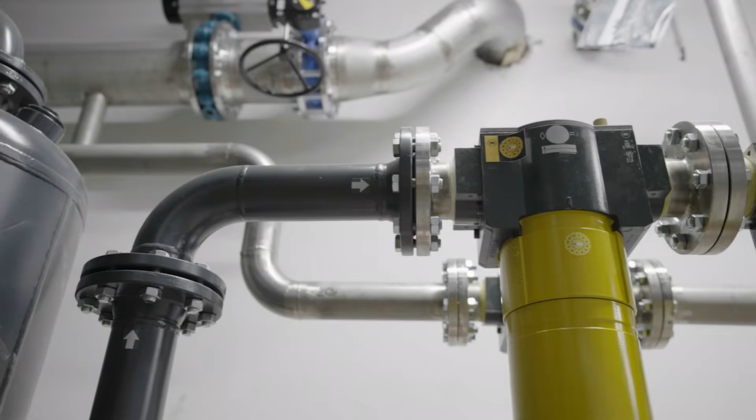For $500 in parts, you can install a system in your backyard that converts a single kilogram of trash into a full hour of cooking gas every day, with no electricity, no compressor, and no utility bill. It also produces about 10 liters of liquid fertilizer a day as a byproduct, and captures the methane that would otherwise escape from your trash into the atmosphere.

Yet across the United States, fewer than 1 in 10,000 homes runs one, and in most municipalities it's nearly impossible to legally install. This is called a home biogas digester. And this is the story of an idea older than the Roman Empire, the 3 Israeli engineers who turned it into a flat-pack appliance, and the reason your gas company would rather you never heard of it.

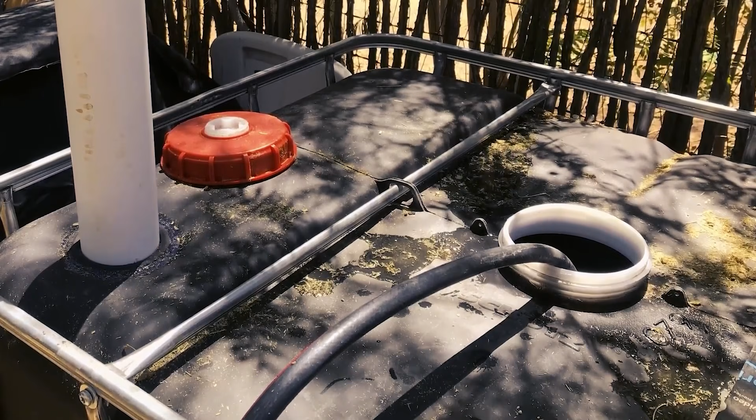The home biogas digester is not a modern invention. To understand where this system actually comes from, we have to go back roughly 3,000 years to the bathhouses of ancient Assyria. Evidence of biogas use dates to the Assyrians in the 10th century BC, where the gas from decaying organic matter was captured and burned to heat bath water.

The Assyrians did not know what methane was. They did not know about anaerobic bacteria. What they knew was that covered pits filled with manure and plant matter produced a flammable gas that could be piped into a stone hearth and lit on demand. It was, in every meaningful sense, the world's first domestic natural gas system, and it predates the steam engine by 27 centuries. But the Assyrians were not alone.

The same principle showed up, independently, on the other side of the continent. Marco Polo's accounts reference covered sewage ponds, and the use of biogas is mentioned in ancient Chinese literature dating back 2,000 to 3,000 years. In rural China, villagers fed sealed pits with kitchen scraps and animal waste, then ran a bamboo pipe out the top and into the kitchen stove.

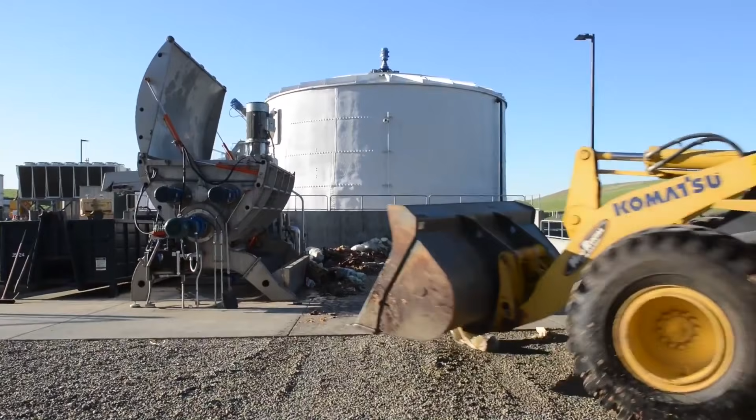Marco Polo returned to Europe from his Far East voyages and described the domestic dragons he observed keeping the streets clean in China. He was describing biodigesters. Europe ignored him for 600 years. The first formal engineered version of this system did not appear until 1859 in a leper colony in Bombay, India. The goal was sanitation, not energy. But the engineers quickly realized the gas coming off the sealed waste tank was clean enough to fuel lamps.

In Exeter, England, a sewage treatment facility captured that gas and used it to fuel the town's street lamps in 1895. Victorian England was lighting its streets with the methane from its own sewage. And then, almost overnight, the world forgot. Natural gas pipelines arrived, and the entire industry pivoted to extracting methane from underground instead of harvesting it from the waste stream every household already produces. But the technology never died. It just got pushed to the margins, where it waited for someone to bring it back.

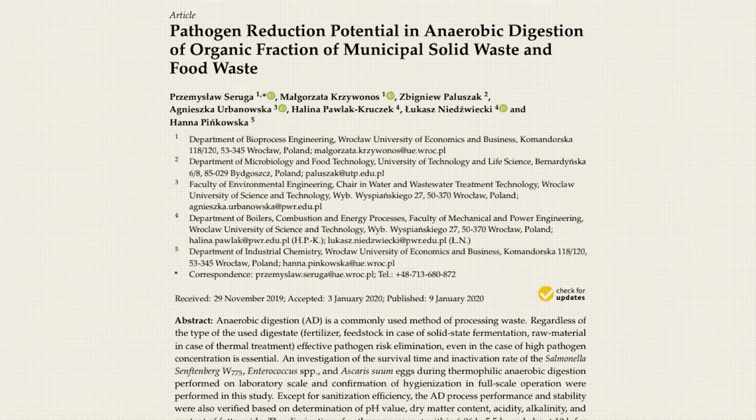That someone arrived in 2007. Yair Teller, an Israeli researcher working on anaerobic digestion at Ben Gurion University, traveled to Mexico and observed small biogas systems running in rural villages. Teller and his eventual co-founder, Oshik Efrati, acquired biogas systems from China and India, installed them locally, and quickly judged them to work poorly. They suffered from poor efficiency, unpleasant odors, and insect infestations. The traditional designs were fixed-dome concrete pits poured in place. They leaked, they smelled, they attracted rats, and they were almost impossible to ship.

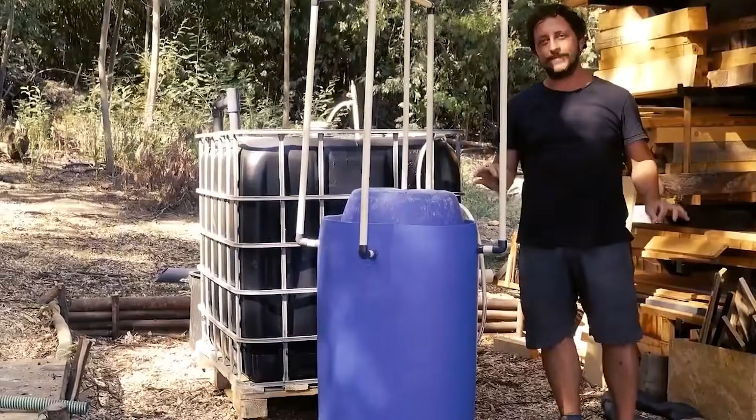So, Teller and Efrati started over. The breakthrough came in figuring out that the digester did not need to be a hole in the ground. It could be a sealed, flexible polyethylene tank, prefabricated in a factory, shipped flat in a single box, and unfolded in a backyard in under 2 hours.

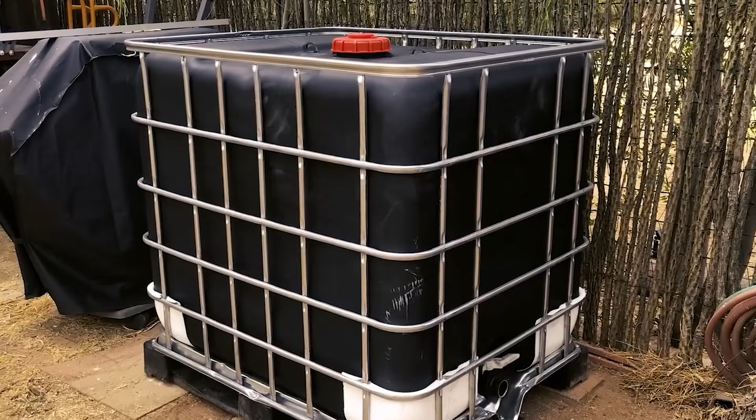In 2012, Teller, Efrati, and Erez Lanzer formally created HomeBiogas in Beit Yanai, Israel. The product was a family-sized above-ground biodigester that looked more like a small camping mattress than an industrial waste plant. It could be installed without a permit in most of the developing world, and it actually worked. By 2022, HomeBiogas had deployed units in more than 100 countries.

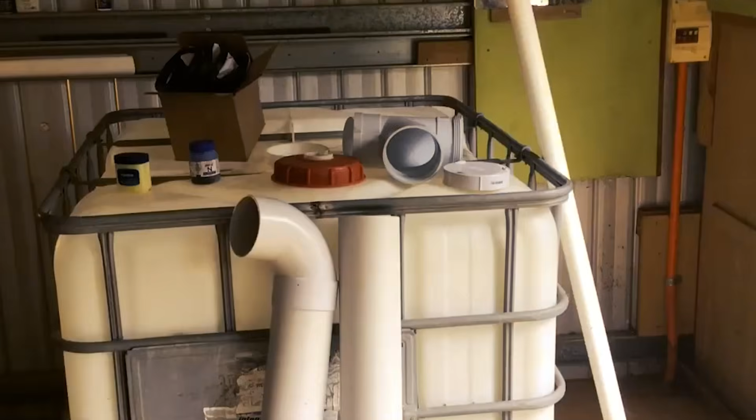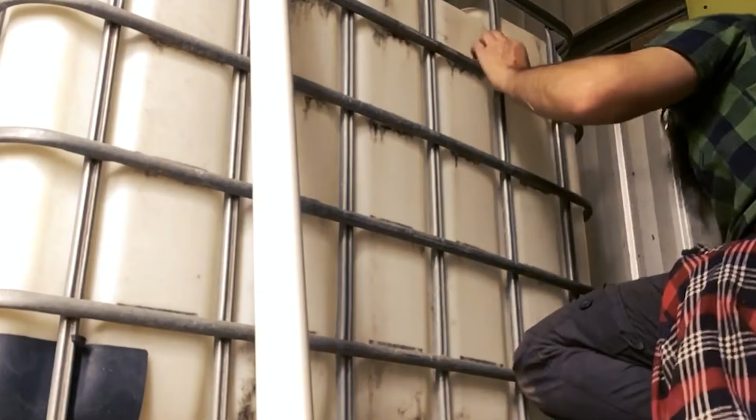But to understand why this matters, you need to understand the physics of what is happening inside that tank. Because once you see it, you'll realize this is not a hippie composting project. This is precision microbial engineering. Here is how it works. When you drop a kilogram of food scraps into the inlet pipe of a biodigester, you are feeding it to a 4-stage microbial assembly line that has existed on Earth for roughly 3.5 billion years. The bacteria that break down organic matter into biogas are some of the oldest single-celled organisms on the planet.

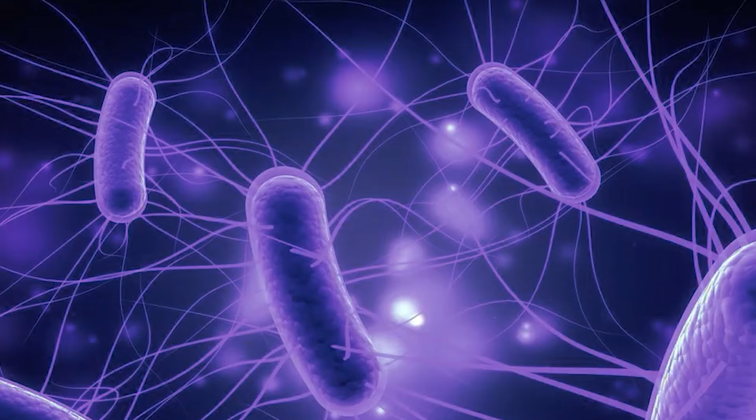The process is called anaerobic digestion, and it runs in 4 named stages. Stage 1 is hydrolysis. Specialized bacteria break the long molecular chains of food, proteins, carbohydrates, fats, into simpler sugars, amino acids, and fatty acids. Stage 2 is acidogenesis. A second wave of bacteria ferments those simple molecules into volatile organic acids.

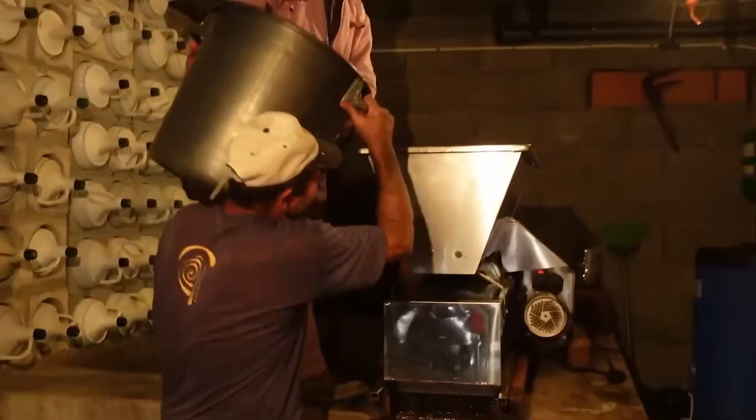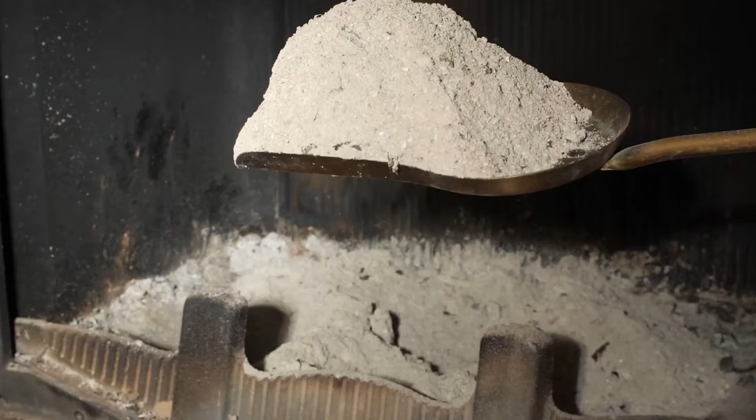Stage 3 is acetogenesis. A third bacterial population converts those acids into hydrogen, carbon dioxide, and acetic acid. And stage 4 is the magic step, methanogenesis. Methanogens are not regular bacteria, they are archaea, a separate domain of life, older than bacteria, and the only organisms on Earth capable of producing methane as a metabolic byproduct. They are also extremely picky.

That gas rises to the top of the tank, gets captured in a sealed reservoir, and runs through a single low-pressure hose directly to your kitchen stove. No compressor, no pump, no electricity. The gas pressure is generated entirely by the weight of the water in the digester pressing down on the gas pocket above it. It's the same principle that pushes a soda bubble up through a straw, and the output numbers are not theoretical.

Home biogas can process as much as 6 liters of food waste or 15 liters of manure per day. The inventors of the device claim that it can eliminate 1 ton of organic waste per year and reduce users' CO2 emissions by 6 tons, equivalent to the consumption of a car.

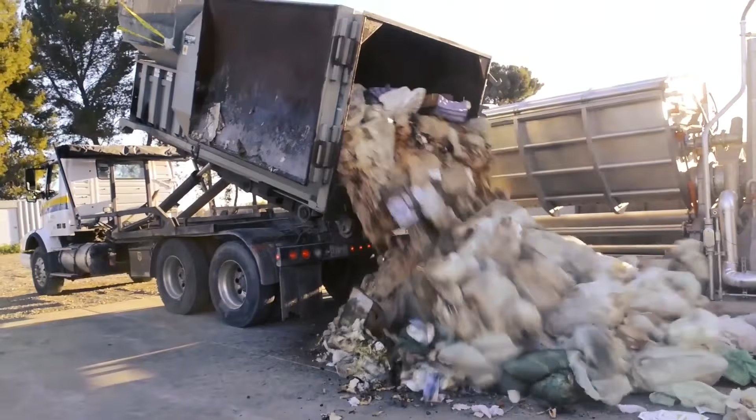T.H. Culhane, a National Geographic explorer who has been building IBC tote biodigesters in slums for over a decade, measured his own system directly. 25 liters of feedstock slurry produces approximately 1,000 liters of uncompressed biogas per day, which allows you to cook on a medium flame on a single burner for about 2 hours. 1 cubic meter of biogas is energetically equivalent to about 2.5 kilograms of firewood, 1.6 liters of kerosene, or 4.7 kilowatt hours of electricity every day from garbage for free.

But raw numbers don't tell the full story. The real proof of this technology comes from the places where it has already replaced the grid entirely. In 2015, in the Palestinian village of Al-Auja in the Jordan Valley, a deployment funded by the Peres Center for Peace installed about 40 home biogas units in Bedouin households with no access to a gas grid. The project received $500,000 in financing from the European Union.

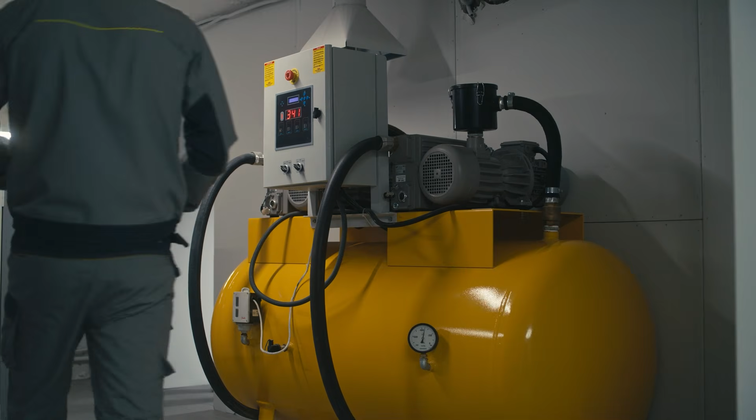Within months, indoor air quality measurably improved, child respiratory complaints dropped, and the women of the village stopped walking 3 kilometers a day to gather firewood. The cooking gas was free, and the liquid fertilizer ran their kitchen gardens. In 2022, the United Nations selected home biogas for the 3rd time in a single year to deploy units in refugee camps. In Rwanda, the systems were fitted with methanogenic bacteria, similar to those found in the stomachs of cows, breaking down agricultural waste into clean gas and biofertilizer.

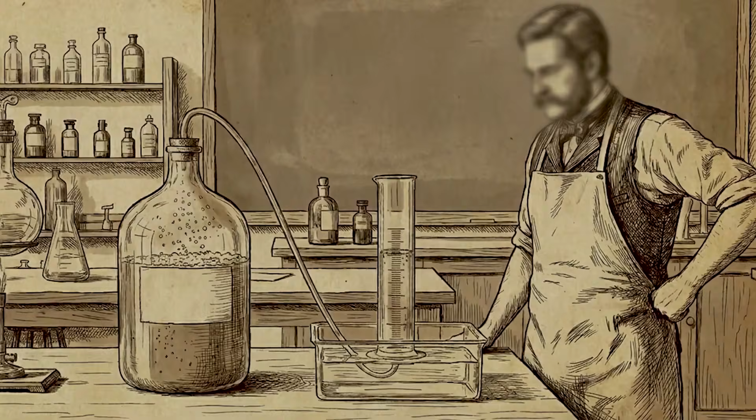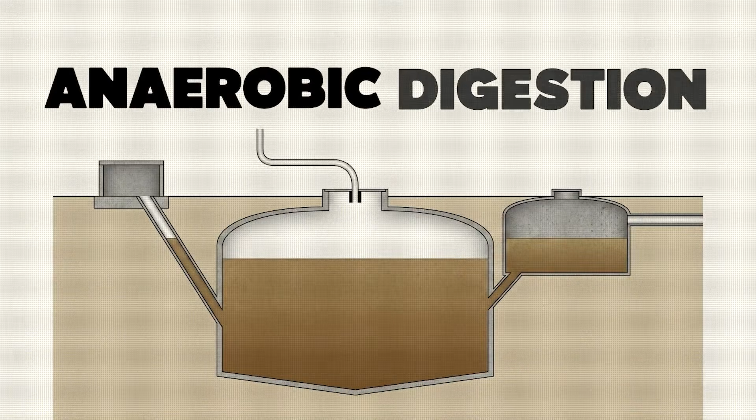In Cairo's Zabaleen trash recycling community, T.H. Culhane's team installed rooftop biodigesters in homes that had no gas service at all, homes built on top of garbage. Those families now cook on gas made from the very garbage their neighborhood sorts. These are not pilot programs. These are working installations in some of the harshest environments on Earth, in active conflict zones and refugee camps, on rooftops in the densest urban slums in North Africa.

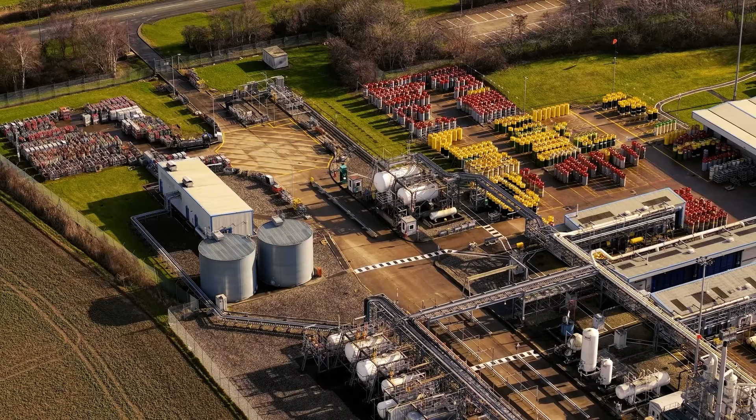So, if this technology has been proven in war zones, in deserts, in refugee camps, and in trash recycling neighborhoods, why has it not become standard in the suburbs of Houston, or Phoenix, or Atlanta, where the climate is warm enough for the methanogens to run year-round, and where the average household throws away more food per week than a Bedouin family throws away in a month? Because the system was never designed to let you.

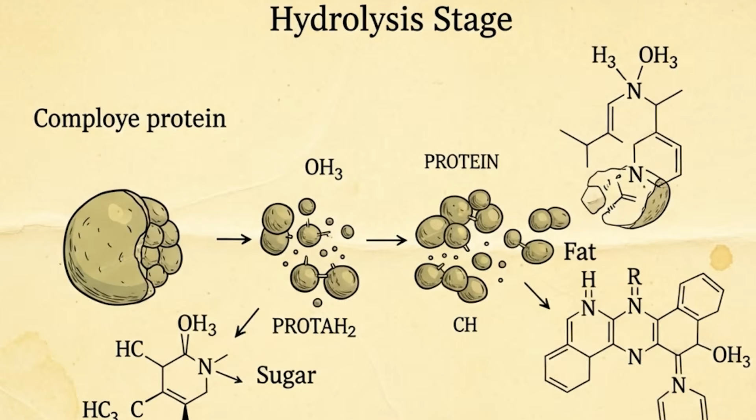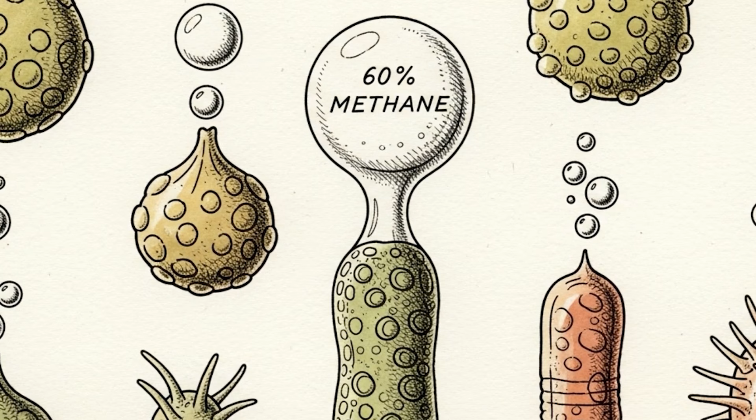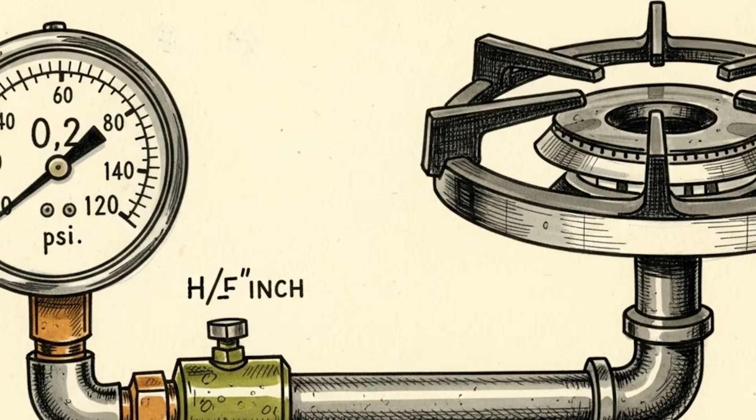In the United States, anaerobic digesters at any scale fall under a tangle of overlapping federal, state, and local permitting frameworks written for industrial-scale dairy farms, not a backyard appliance. Digesters must meet local, state, and federal regulatory requirements for air, solid waste, and water. The regulatory landscape varies across jurisdictions, leading to a lengthy and costly permitting process and a fragmented framework.

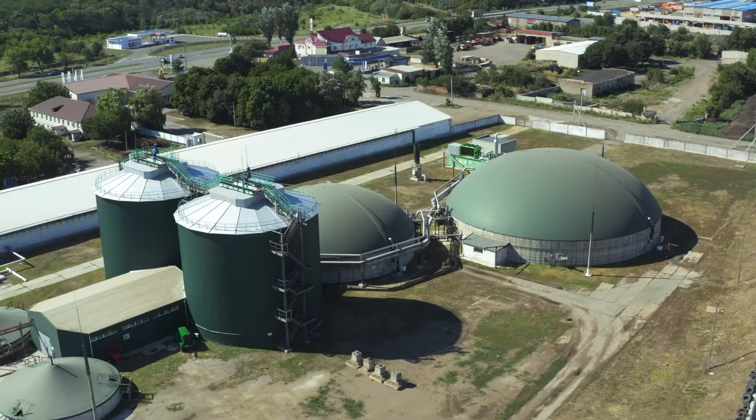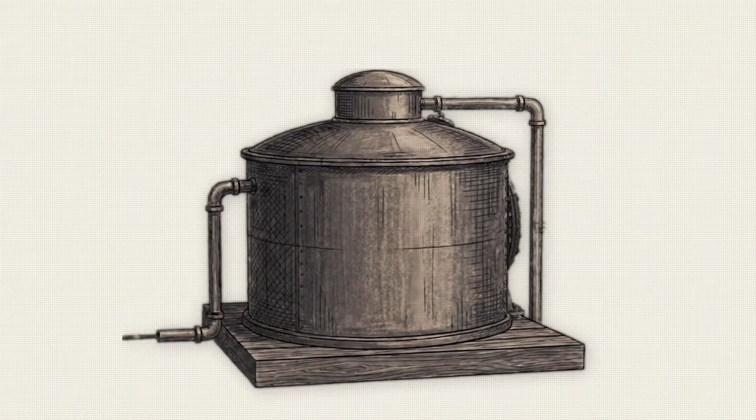In California, an in-vessel digester triggers Title 14, Chapter 3.2 of the state code, a framework originally written to regulate landfills. In Pennsylvania, it triggers the State Nutrient Management Plan, even though a household digester produces no measurable runoff. In most cities, it triggers the local building department because methane is classified as a hazardous gas under the International Fire Code, regardless of the volume produced.

None of these frameworks were written with a home appliance in mind. They were written for 10 million-gallon dairy lagoons. But because no separate category exists for a household-scale digester, the appliance gets regulated as if it were a factory. This is the trick. No one in Washington passed a law banning home biogas. They simply never wrote a law permitting it.

Every other gas appliance in your house, your stove, your water heater, your furnace, exists inside a legal carve-out written for the natural gas utility. There is no equivalent carve-out for gas you produce yourself. And here is the framing that flips the entire picture. We are told that the natural gas grid is modern infrastructure, and that on-site biogas is a developing world workaround. But in reality, the grid is the primitive solution.

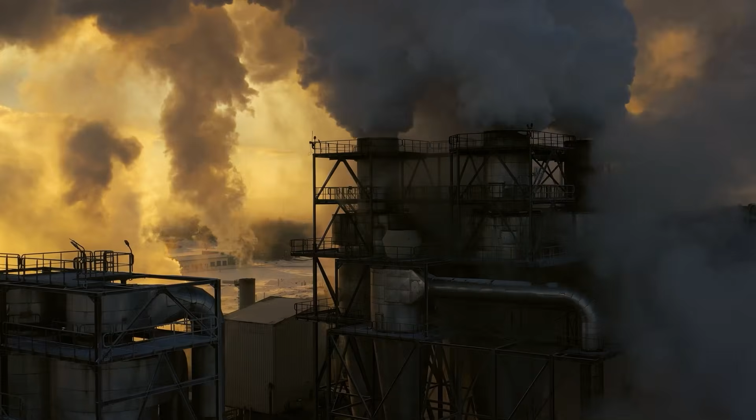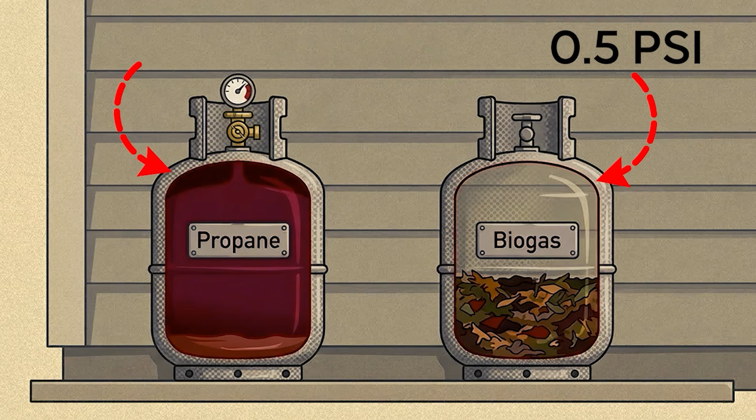The biodigester is the sophisticated solution. It closes the loop in a single tank in your backyard. It eliminates the leak. It eliminates the drill rig. It eliminates the bill. And it has been working in some form since the reign of King Tiglath-Pileser. The reason it isn't everywhere is not that it doesn't work. It's that no one has figured out how to put a meter on it.

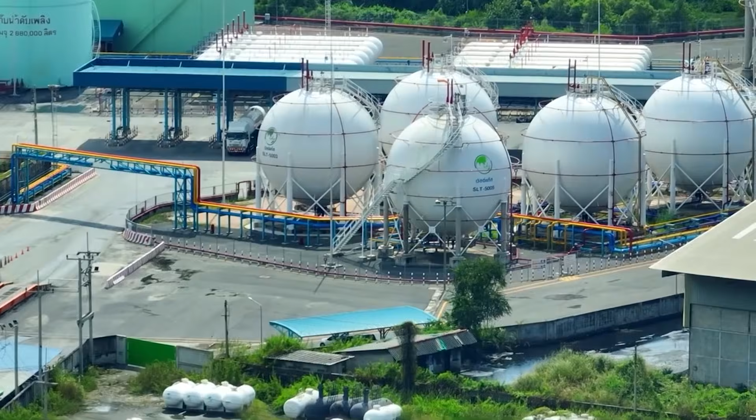So, how do you actually do this? There are two paths. The first is the off-the-shelf path. The HomeBiogas 2.0 unit, sold directly by the company in Beit Yanai, Israel, ships in a single box, requires no permit in most rural and unincorporated jurisdictions, unfolds in about 2 hours, and starts producing usable gas within 2 to 4 weeks of initial inoculation with a starter slurry of cow manure.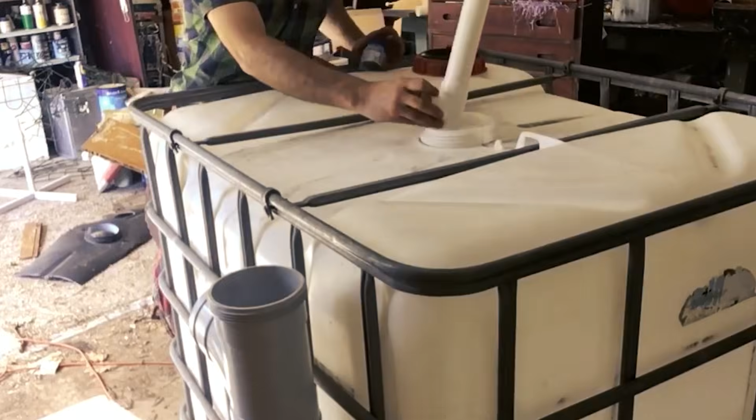It runs in any climate where outdoor temperatures stay above 63 degrees Fahrenheit, which covers most of the southern half of the United States year-round, and the rest of the country from roughly May through October. The unit retails for under $1,500. The second path is the DIY path, and this is where the $500 figure comes from.

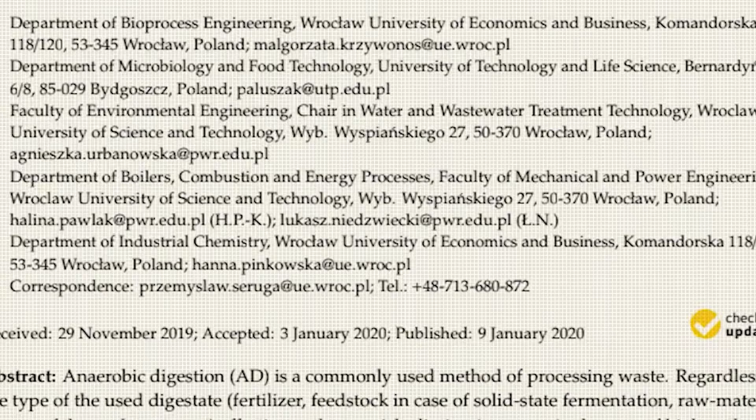A used IBC tote tank, the 1,000-liter, 275-gallon practically indestructible HDPE tanks that ship liquids all over the world, can be had on Craigslist for about $125. With 2-inch PVC inlet pipe, 1-inch effluent pipe, a few bulkhead fittings, and a low-pressure gas hose, the total parts cost lands between $400 and $600.

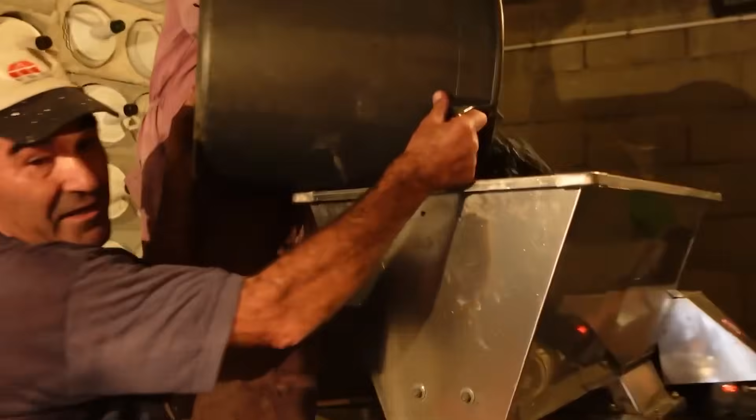The build is documented step-by-step in a freely available illustrated manual called How to Build a Solar Cities IBC Tank Biodigester, authored by Dr. Thomas Henry Culhane and Janice Kelsey. Solar Cities, founded by Culhane, also runs free hands-on workshops in dozens of countries. The Facebook group Solar Cities Biogas Innoventors and Practitioners is, at this point, the closest thing to a global open-source community for this technology.

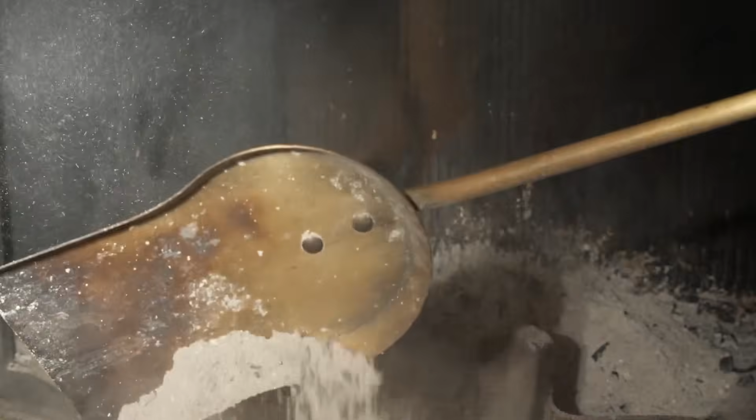The honest limitation: cold climates will cut your gas yield in half during winter unless you insulate or heat the tank, and any system needs roughly 4 to 6 square meters of outdoor space to operate safely. The home biogas digester is a 3,000-year-old answer to a 21st century problem built from a sealed polyethylene tank, shaped by the same anaerobic microbiology that heated Assyrian bathwater and lit Victorian Exeter.

And the regulatory system has decided that because no one figured out how to meter it, it must be treated as an industrial hazard instead of a kitchen appliance. A lot of what this channel covers sits outside the mainstream, not because it failed, but because the system was never designed to accommodate it. The meter has to fit before the appliance is allowed to exist.